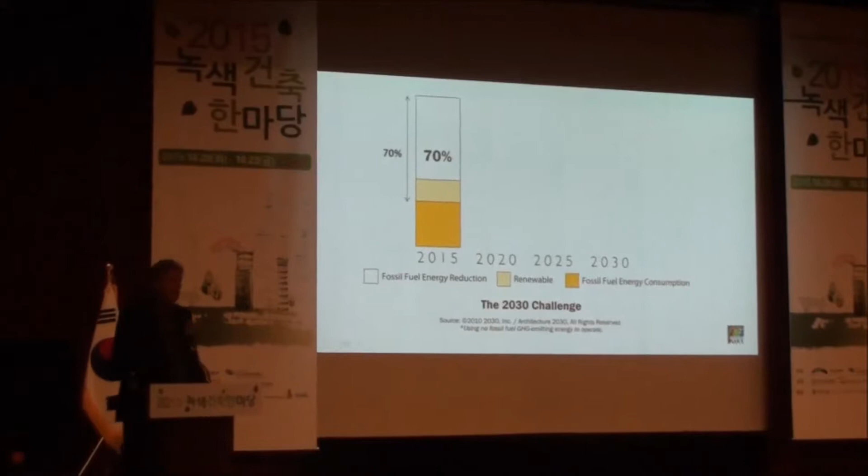In 2002, we formed a research and planning organization called Architecture 2030. It's a nonprofit organization that does studies and research and develops programs for reducing energy consumption and emissions in the built environment. And in 2006, we issued the 2030 Challenge targets for architects and designers all over the world. And we said that if you're going to design a building today, in order to stay under 2 degrees Celsius, you need to design to a 70% reduction below the average buildings. Your building needs to be 70% more efficient, less fossil fuels. And then 30% can be fossil fuels.

But in 2020, that number goes to 80%. In 2025, 90%. And in 2030, all new buildings and major renovations must be carbon neutral, meaning they use no fossil fuel energy to operate. That doesn't mean they don't use energy. They'll use renewable energy, either on site or purchased from the utility. But in order to stay under 2 degrees Celsius, this is what we need to do. So how do we get to carbon neutral?

Well, the most cost-effective way is through design. This doesn't cost anything. What kind of form is the building? Orientation. What kind of color of the building is actually very important. What about shading, so we don't need much air conditioning? Passive heating, passive cooling strategies, natural ventilation, daylight. All commercial buildings are day-use facilities. We daylight them, we eliminate much of the lighting.

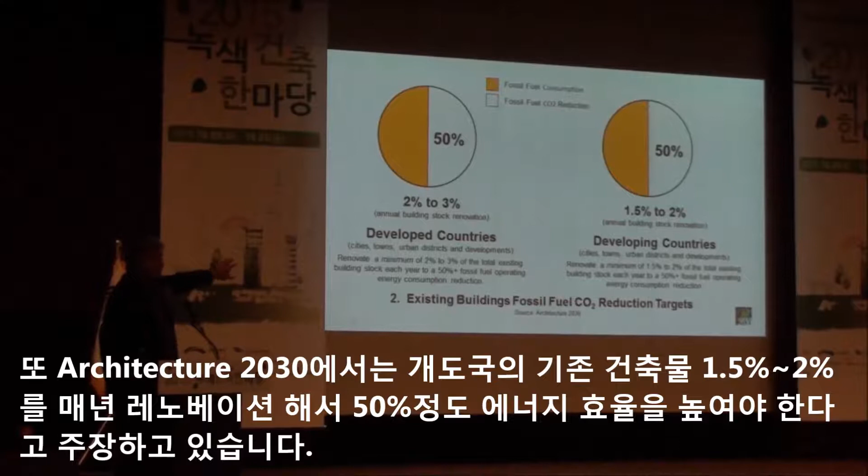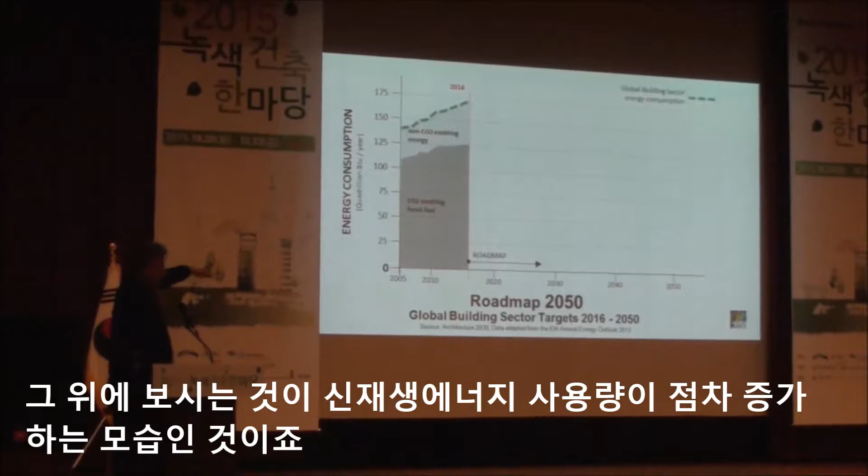This is energy consumption in the world today. In the gray is fossil fuels. Above is renewable energy, clean energy. So we're going up. If we adopt the program that we laid out, then this is what happens. We reduce the energy consumption needed for buildings by about 1.25% a year.

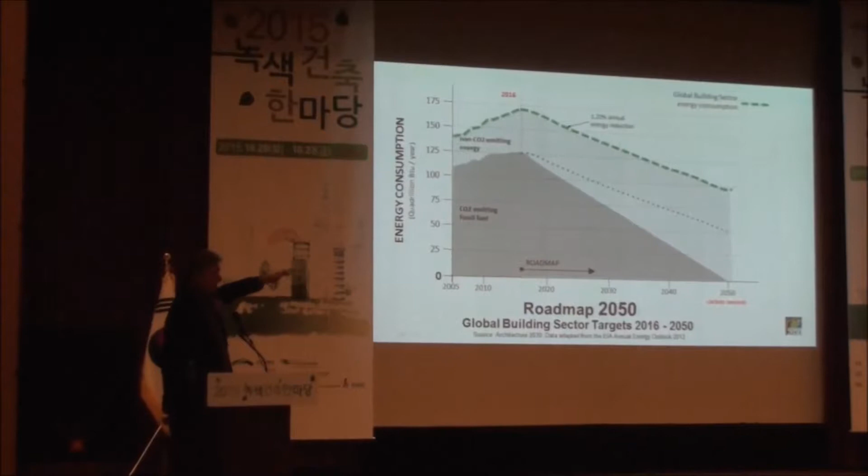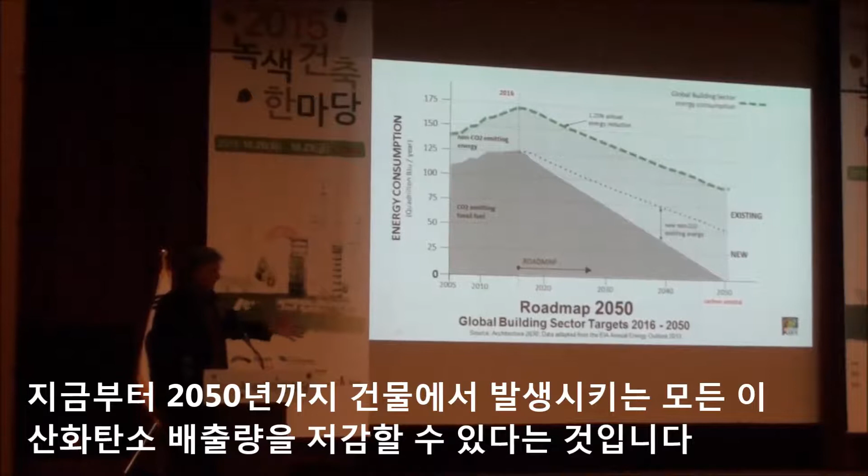That doesn't mean we don't need energy, we need energy. But the top part is already renewables that we have. And if we double that and supply the building sector with more renewables, double what we have now in the world today, between now and 2050, then we phase out all CO2 emissions in the building market. So how are we going to do this? It's a big question.

We're going to need three things. Leadership: the people who are up here receiving awards for green buildings, they're the leaders. And we need more leaders. We need to show how to do it. And we're going to need stronger building codes that come in over time. And then we need the right information and tools to be able to design to the carbon neutral standards. If we have those three things, we make it. If we don't do this, we don't make it as a plan.

So first, leadership. Since we issued the 2030 targets, the 60, 70, 80, 90 to carbon neutral, in 2006, 70% of the top 20 architecture engineering firms based in the U.S. have adopted the 2030 targets and are designing to those targets. They don't meet it every time, but they're working to meet the target. Very seriously doing this. 54% of all AE firms in the U.S. are designing to the targets now.

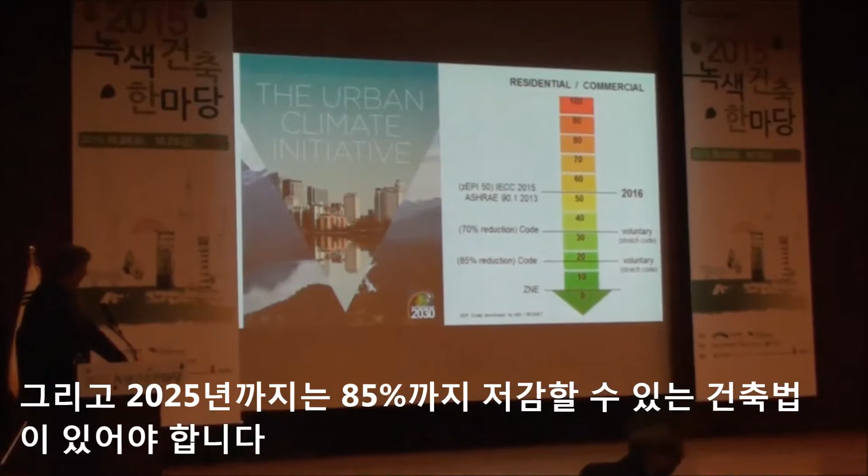So we say by 2020, we want a 70% code reduction, to implement that code in New York City and other cities, all the cities that are going 80 by 50. We say in 2025, we want an 85% reduction in code, and by 2030, the code should be zero net energy.

And the code would apply to all new buildings, to big building renovations, but also to building purchases at sale. So that if you buy a building, you have enough money to renovate the building. The building purchasers are the ones who have the money and get the financing, and it's easier for them to renovate. And so we say for all building purchases, you should meet the current code standard if your building doesn't.

And then we say that in 2016, the 70% reduction code and the 85% reduction code ought to be what we call stretch codes. Meaning, if you want to meet a better code standard, we will give you all sorts of money and tax reductions so that you do better, so that we get more buildings out there that do better than the code.

So that by 2020, it's the 70% code. We have enough 70% buildings out there, so we know how to do it. And then the 85% and the ZNE become the voluntary codes. In 2025, we have the 85% code, and the ZNE code is the voluntary code. Give all the incentives, and then in 2030, we're at ZNE code. So what would that look like in Korea? How would we do here?

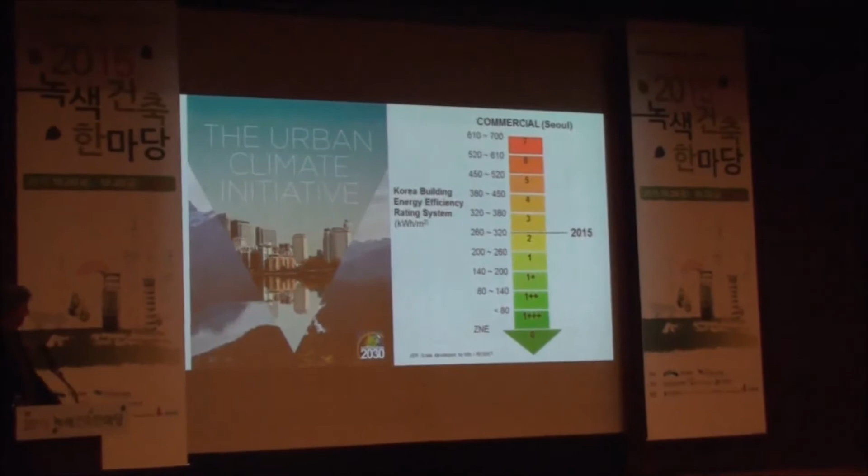Well, you have a system, an energy efficiency rating system. And today for commercial buildings, you're between 260 and 320 kilowatt hours per square meter. So that's what you're designing to today. So we say by 2020, put in place a new code, that's 140 to 200 kilowatt hours per square meter. By 2025, 80 or less. And then by 2030, a ZNE code.

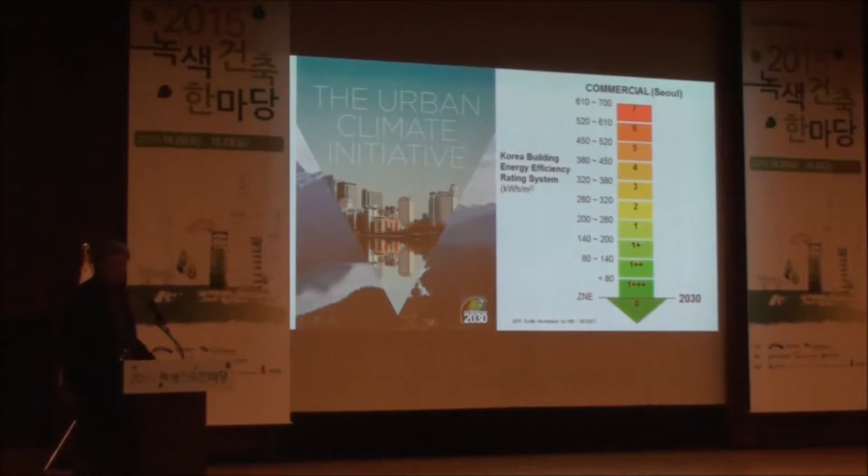So in 2015, the 140 to 200 becomes the voluntary stretch code with all the incentives. And then in 2020, the 140 to 200 becomes the code, and the stretch code is 80 or less, and we get money and incentives, tax incentives, and low interest loans if you meet the lower target, and then in 2025 it's the 80, and then the ZNE becomes the stretch code. So that by 2030, all buildings in Seoul would be designed with zero net energy standards and zero emissions standards.

Well, okay. So now how do we do this? What are the tools necessary to do this? How do we get the carbon neutral design, or ZNE, zero net energy, the same? It's a two-step process. Step one is information. We need the design information, the right information and the tools. And then the second is we need the technology.

So what do we mean by information? Information is design and planning. How do we design these buildings? What are the guiding principles? Just like in the modern movement, what are the guiding principles that are going to transform us to the new environment? That will get us, we can get 70, 80% out just through design.

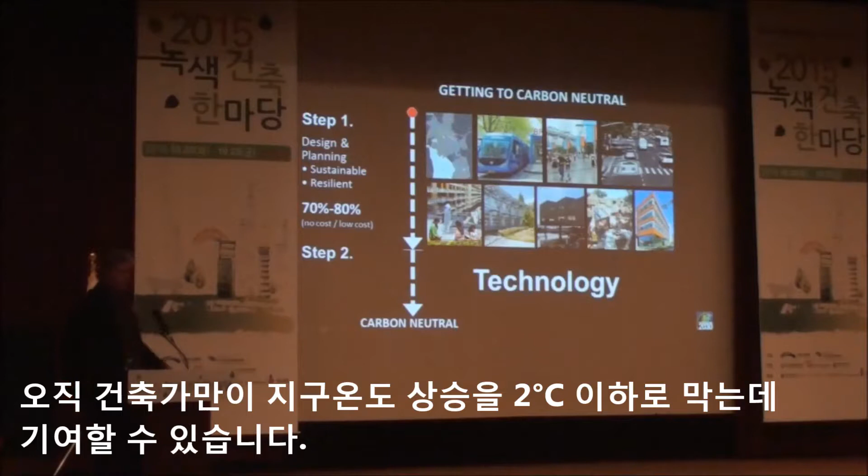Everything from development strategies, walkable communities, transit development, how we design our buildings, what kind of materials we use, building elements, all of that we have to relearn and know how to do now will get us a 70 to 80% reduction, something we call the no-cost or low-cost option. First, that's the first thing we do. We don't go out and spend lots of money. We give our client value in design.

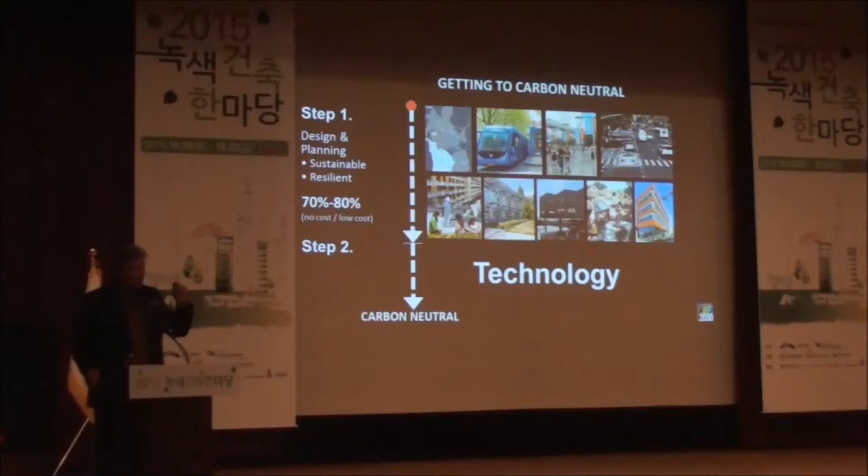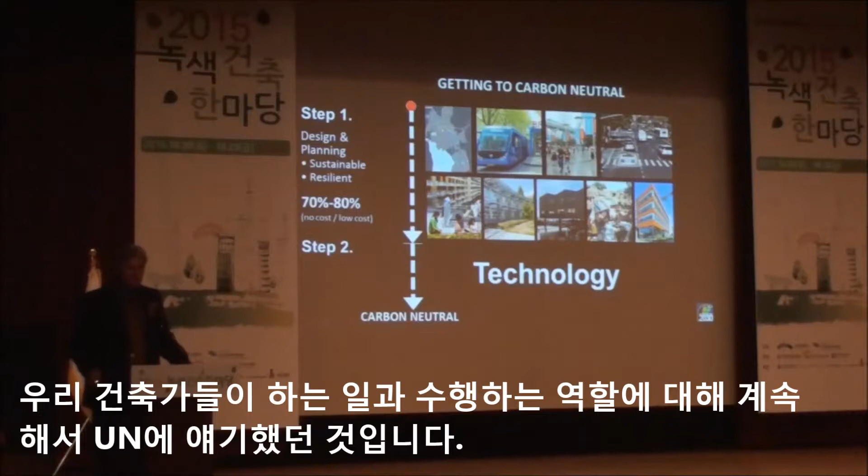We become the most important players in the world in reducing emissions. And again, if we don't do it, it can't get done. It's impossible. Only the architecture and planning community can get the reductions that we need to stay under 2 degrees Celsius. Make no mistake, and the UN is finally understanding that. They never really understood what we do. Very few people understand what we do and why we're so important. But now they understand. We've taken that message, and other architects have taken that message to the UN and said, this is how we're going to do it.

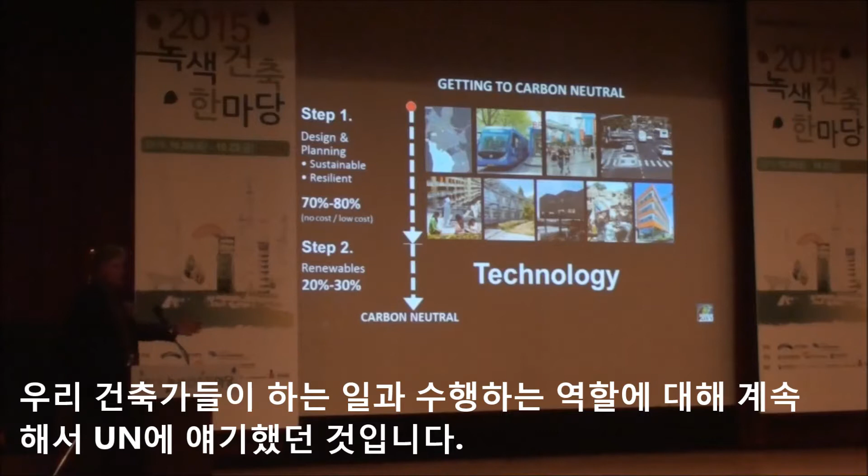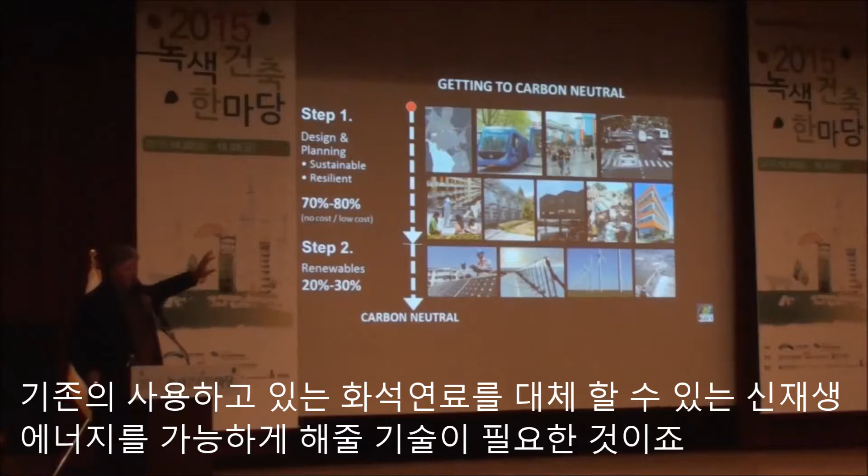And then we need the technology. That gets us another 20 to 30% because all buildings need energy to operate. But we reduce the energy consumption so we can phase in the renewables to take over from fossil fuels. And that's everything from site solar, hot water, to utility scale PV and wind, biomass, and hydrogen. All of those will then supply what the building sector needs if we do our job correctly.

So let's talk about information, tools, and education. We have a problem. The tools now are very highly technical, they're very difficult to use, and in many cases, you need another expert, 2 or 3 experts to tell us how to design. By the time we design something and give it to the expert, the design is already done. And so they come back and say, you have a bad building. And we say, well, can you make it better for us? That's not the way to do it.

We need the design information and the tools. We need real-time simulation so that every time we draw something, it tells us if we're doing better or worse. Not later on when we give it to some expert. So we're working with Sefaira, which is now on the market, real-time simulation for SketchUp and for Autodesk Revit. Meaning, if you're designing in Revit or in SketchUp, I'll show you in a minute how that works. There's a dashboard, that's a part of it. We're working with Autodesk on Green Building Studio for real-time simulation. We issued the 2030 Palette that gives you all the guidelines, the rules of thumb that you can use when designing a building.

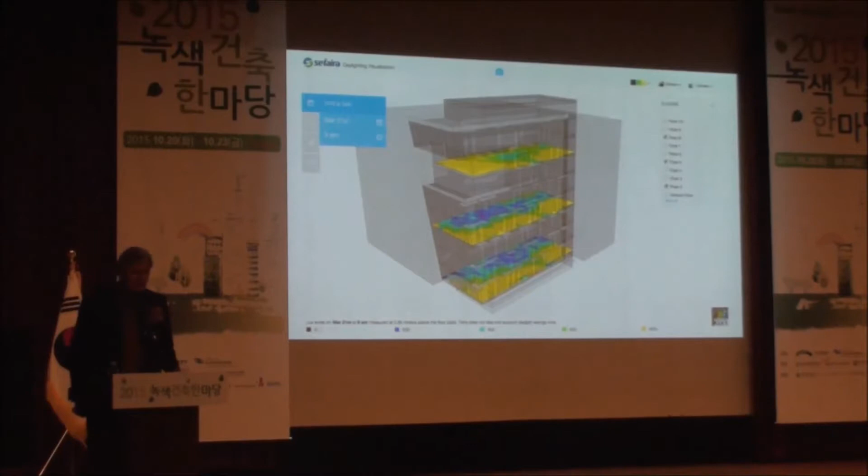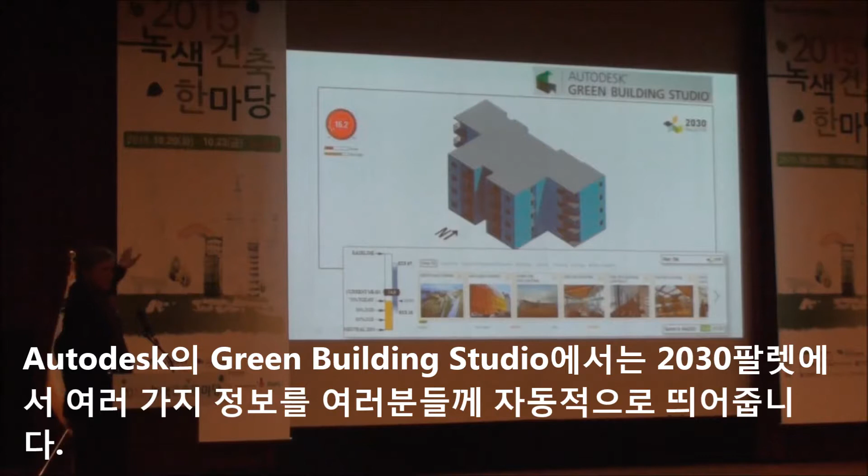And they'll actually show us how we're doing daylight, what spaces are daylit and what aren't, so we can refine the design instantly, in real time. And in Green Building Studio, as you're designing, it will pull up the information from the 2030 palette of the things that you need to look at in order to get your design ready.

So we're working with both developers. And then we're teaching the architects how to do this all over the U.S. We have 27 chapters of the American Institute of Architects teaching, training the architects on all the new information. And we have teachers who know how to do this.

Just like in Korea, there are teachers that know how to do this. There are practitioners who know how to do it, people at the institutes, at the universities that know how to do this. And we need to enlist them to teach. And that's what we've done in the U.S. and in Canada.

So yesterday, we signed the Memorandum of Understanding with the KGBC. We talked to the professional architecture community about running a series similar to that, taught by Koreans for Koreans, based on the guiding principles on how to design this new kind of architecture. And hopefully by March, April, we'll have the first sessions ready. We'll work with the people from the KGBC to get that ready.

So I want to thank you for inviting me here. And good luck with your architecture, because the world is dependent upon it. And you have a big responsibility, because you have two of the most important global positions now in the world, and you need to show that leadership. Thank you.

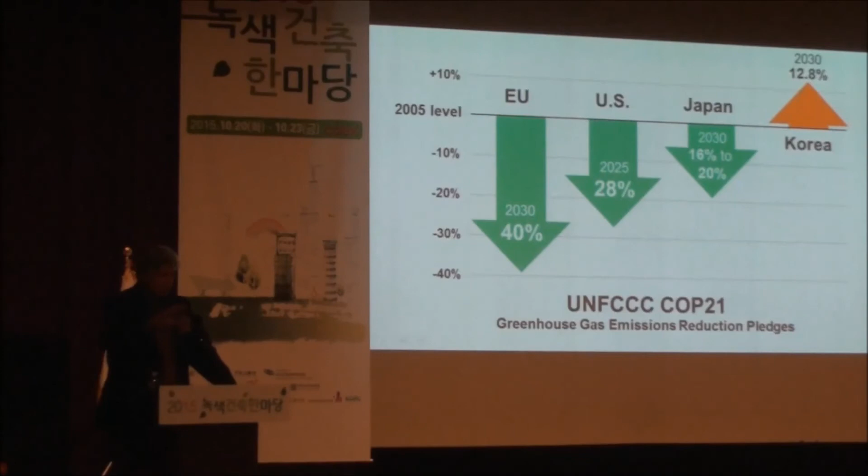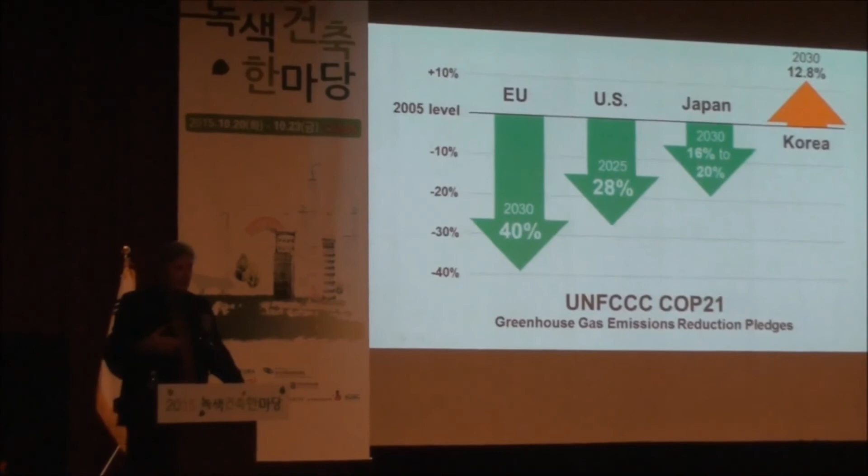So it's good data. And he gives us the data, it's very low carbon, and I specify that product for carpet or for wood or for whatever. And I say I'm not going to specify other manufacturers. And if enough firms do that, enough architects do that, then all the manufacturers of that product type have to reduce their emissions in order to sell the product.

Now I know in the US we get to select products, especially for private projects. In Korea, I understand you can't specify a product, only put out the guidelines for what the product has to do. But if someone comes to our office and says, I have carpet at the same price, but my carbon emissions are way down here,

and you specify that performance criteria, and they're the only ones, or one or two, who can meet that criteria, then every other carpet manufacturer, if enough architects are doing it, will reduce the emissions of their product. So not only do we control how much energy a building uses to operate, we control what products a building is made of. And we can change the entire industrial sector of the world.

Because if you're manufacturing glass, you know how much glass we use? We have glass cups, wine glasses; once they're producing low carbon glass for our buildings, they'll produce low carbon for all the rest of the stuff, because they will have already changed their manufacturing process. So architects have huge power that they don't even know they have. But now they're beginning to understand it. And the ones who step out in front will be the ones who get all the work.